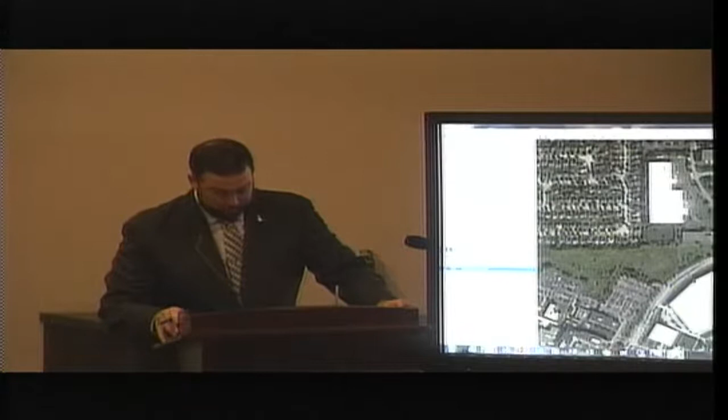Access to the property is from two points, one being off of Remington Boulevard to the southeast and one off of Wood Creek Drive to the northwest. The facility has adequate parking for the proposed use. Per the zoning ordinance, auto service, rental, sales, and supplies are not permitted within the I-1 district.

As such, the applicant is requesting a special use permit to allow a full-service auto detail shop, commonly known as Aesthetic Detail Studio, at 490 Wood Creek, Suite C. Per the applicant, the hours of operation would be 7:30 a.m. to 7:30 p.m., 7 days a week.

This is kind of like an appointment type thing where you would go onto his website, sign in, and pick out the time that worked for you, so he can be very accommodating in that area. All vehicles would then be brought inside to be detailed and no work would be conducted within the parking lot. This isn't like working on the cars per se, this is like your ceramic coatings, professional interior and exterior details, acid washes, things like that.

So the space is already accommodating with a floor basin that can handle fuel and oil and a separator. Staff doesn't have any objection to this type of use, and it'll actually be next to a use that does online car sales. Who knows, maybe they'll work together to detail some of those cars that he's going to sell.

So staff is recommending approval of a special use permit for a planned development to allow Aesthetic Detail Studio at 490 Wood Creek, Suite C, subject to all vehicles being serviced or stored inside the building. This concludes my report. Thank you, Mr. Eastman. Any questions from the commissioners?

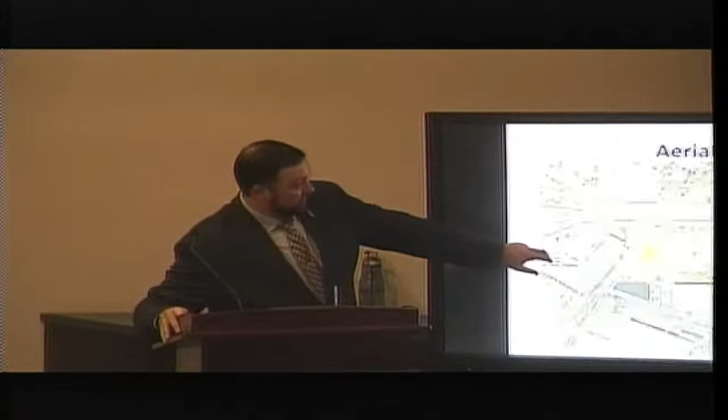This is located at the southeast corner of Stevenson Drive and east-south frontage road. So to get your bearings, this is Stevenson coming in here, and then frontage road is here with I-55.

The roughly 15.656 acres of land is zoned I-1 Limited Industrial and is located at the southeast corner of Stevenson and frontage road, the majority of which was previously owned by LaGrue Distribution and serves as the corporate crossing stormwater management facility. Access to the property would be provided off of frontage road for the east side of the property, and this is also connected to the next item in the agenda, which I will get into separately.

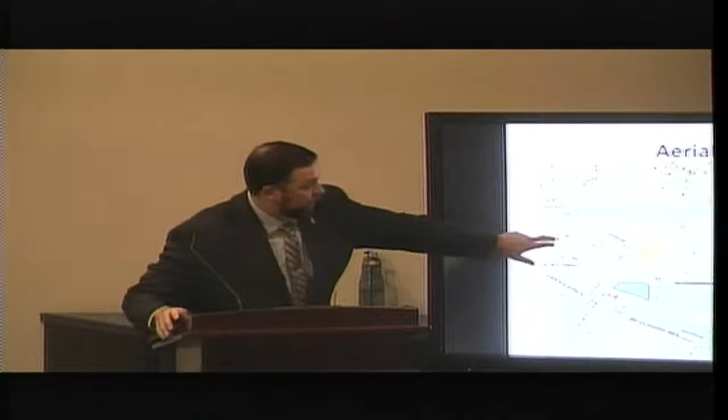They are here to first request a final plat of subdivision. The property total size, which would include 297 and 301 east-south frontage road, is 25.422 acres. It's all zoned I-1, and the purpose of this would be to subdivide it and create 5 lots of record.

Lot 1 would be approximately 3.5 acres, created for the parking lot expansion of Stevenson Crane. Stevenson Crane is on the west side of Stevenson Drive, but they do own this property, and they are looking to work in conjunction with this applicant to regrade the stormwater management facility in order to make this property usable for them to store vehicles on.

Lot 2 would be approximately 6 acres, created for the purposes of a stormwater management facility, and it would include specific language outlined in the Will County Countywide Stormwater Management Code. Lot 3 would be approximately 5.99 acres, created for the parking lot expansion of the previously mentioned 297 and 301 east-south frontage road. Lot 4 and Lot 5 total roughly 9 to 10 acres, and would be created for 297 and 301 east-south frontage road.

Within your packet, you have the proposed final development plan. This attached plan proposes to modify that stormwater management facility, which is pretty much centrally located within this development. This would be to construct a parking lot expansion for the benefit of 297 and 301 east-south frontage road, which would include roughly 117 truck stalls for short-term parking in conjunction with the existing truck, trailer sales, and rentals business. If you're familiar with Ryder Truck there at 301 east-south frontage road, they're doing quite well, so the additional space will help them utilize more inventory.

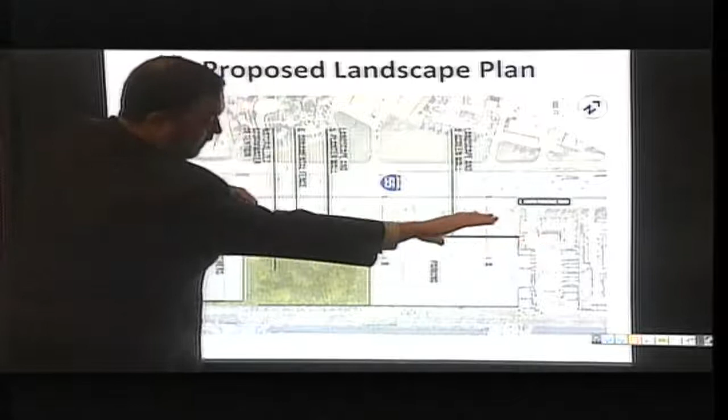Part of this plan, which you can see better on the color rendering, shows they're proposing to construct a 5-foot brick planter wall, and in front of the wall would be a 6-foot ornamental fence. If you've driven down frontage road here, the applicant owns some additional property and wants a unified look. He has a nice wrought iron fence going the length of the frontage road, so that fence line would be picked up by this new development, including the wall and landscaping to help screen the parking area.

In order to develop this property in accordance with the plan before you, he is here to request one special use and a number of variances. The first is a special use to allow the truck and trailer sales and rentals. The village is willing to support this, subject to approval of the landscape plan I discussed, including the wall and ornamental fence.

The second would be to install a non-dust-free surface within the parking lot. This darker gray area in the middle of the proposed parking lot would be heavy-duty concrete for the trucks to actually maneuver in. The stalls themselves are proposed to have CA6, which is by code a non-dust-free surface. Staff is willing to support that as requested; we just request that he take appropriate measures to keep any material from being brought onto frontage road.

Number 3 would be a variance to reduce the required front yard setback. Within the I-1 district, all these properties have to maintain a 35-foot front yard setback. The applicant is requesting to reduce that to roughly 5 feet in this area. But as you can see, his property backs up to a very large section of land owned and controlled by IDOT, so even with the reduced setback he will be quite a ways off of the road. Staff was willing to support a reduced setback in some areas to allow for proper truck circulation.

When industrial properties are developed, you're probably familiar with the berms along Remington that front any thoroughfare. In this situation, he cannot control or touch the IDOT property, and there's quite a bit of drop-off that has to climb back up. So it's somewhat of a berm, but not the typical undulating up-and-down berm. He's requesting a variance to waive that requirement as well as the irrigation system, and staff is willing to support that subject to all the landscape material he's willing to install, which is above and beyond what code would require.

Number 6 is a variance to relocate and distribute the required plant material within the side and rear yards as well as around the detention area. Typically when you create a pond, there has to be a certain number of plantings around the high water level as well as within the rear and side yards. He's requesting to take all that plantings and put it up front to provide as much screening from traffic on I-55 and the frontage road as possible. Staff was in support of that as well, since this will be a natural looking stormwater area, so rather than the plantings being hidden there, we felt it would be much better in the manicured front yard.

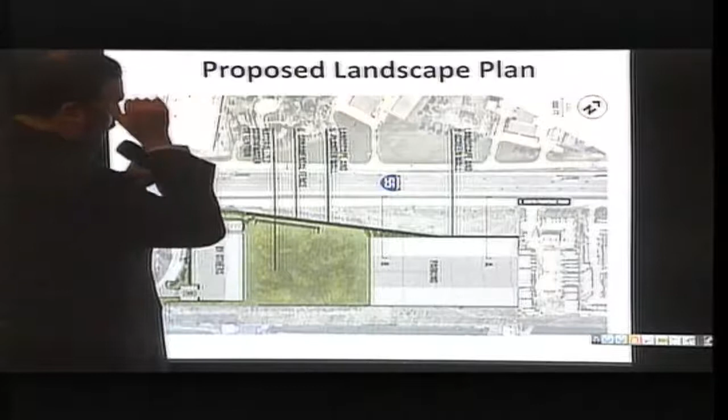Number 9 would be a variance to waive the required public improvements within the right-of-way along frontage road. When you develop a property, you're typically required to put in necessary public improvements along the frontage of the road—your parkway area with parkway trees, a sidewalk, and street lights. Well, frontage road doesn't have any of that, so we're willing to work with him on this as well, because there would be a sidewalk to nowhere essentially, and right now there are no street lights on any part of South Frontage Road, nor would we want street lights 75 feet off the road. So we're willing to support that variance as well.

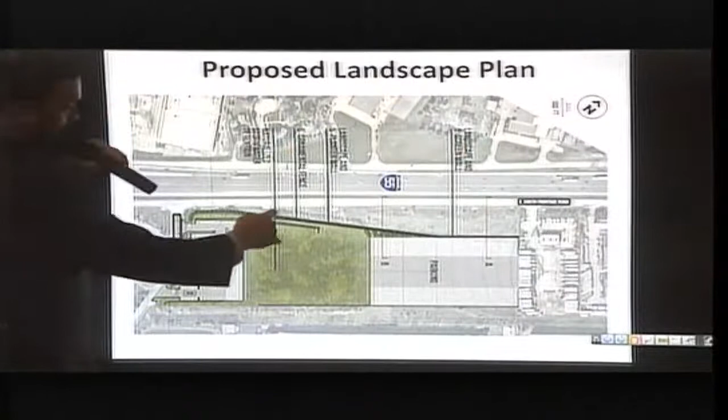Number 10 would be a variance to allow all the overhead utility lines to remain above ground. There are utility lines running within the IDOT property here, and when you develop property, you're typically required, at the developer's expense, to bury those lines. But in this particular area, which is an older part of town, all these lines have remained above ground. We supported the variance in the past for the property to the east of this, so this is just remaining consistent and supporting the same variance for this property.

Lastly would be a variance to increase the fluctuation of a pond. Chapter 33 of the municipal code requires pond fluctuation not to exceed 6 feet, and the applicant is requesting a variance to increase the fluctuation to 14 feet. It may not be that high, but we wanted to give them a little wiggle room as they finish the design of this reworking of the stormwater facility.

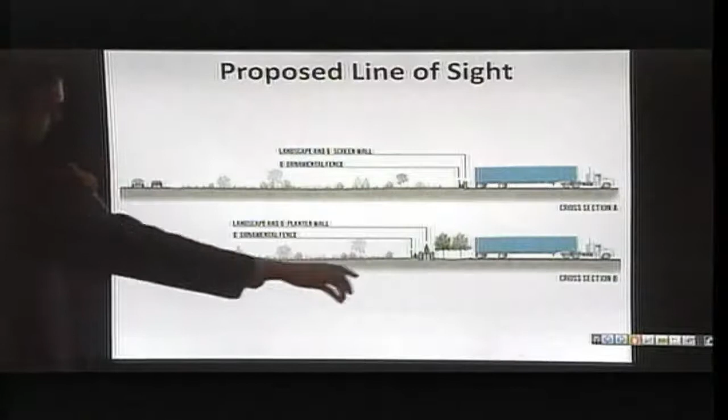That all being said, I wanted to show a few views. Cross-section A is up more towards the east side of this site. Before, he only has about 5 feet to work with, so he'll have the wall, the landscaping material, and then the fence, with all the IDOT property we talked about. As you continue moving west, he's able to construct a bit of a wall where he can have plantings on top, as well as the fence and additional plantings in between both sides. So it gets a nice finished look to the site, much more than what you see today if you drive down I-55.

With all that being said, staff is here to recommend approval of a special use permit for a planned development to allow for the construction of Drew Enterprises development at the southeast corner of Stevenson Drive and East South Frontage Road, with the aforementioned variances and special use, as well as recommending approval of the final plat of subdivision and final development plan, subject to all staff's comments from July 8th being addressed, and review and approval from the Director of Public Services and Development. And that concludes my report.

Thank you, Mr. Eidson. Any questions from the commissioners? Commissioner Shank asked: the setback was originally 35 feet?

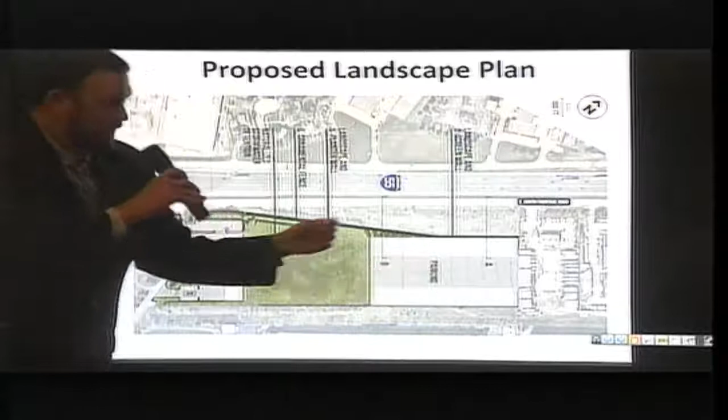They're requesting a variance. I think it's important to keep in mind that there's almost 80 to 90 feet of IDOT property here, so if you drive down the street it looks like they're giving you a 100-foot buffer. If you take 35 feet into that, he loses the ability to circulate the trucks inside of the lot, which is why we were willing to support it.

If you were right next to the thoroughfare, that would be a whole different story. Right, exactly—if he had abutted frontage road, that would be different.

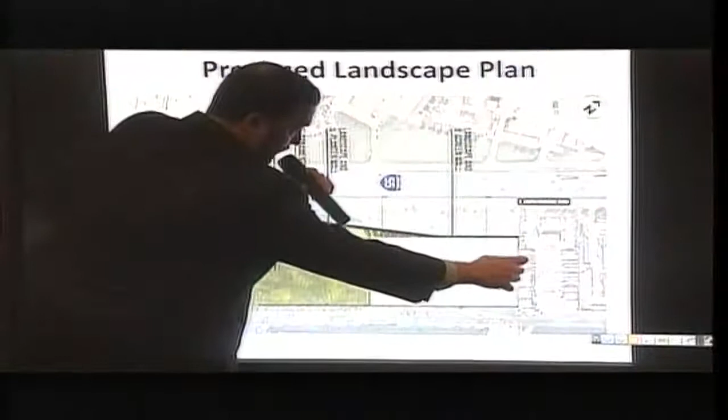Commissioner Shank asked: entrance and exit from lot 3 is only through lot 4? Correct. There will be a cross-access easement that allows the trucks to enter and exit onto frontage road as part of the plat.

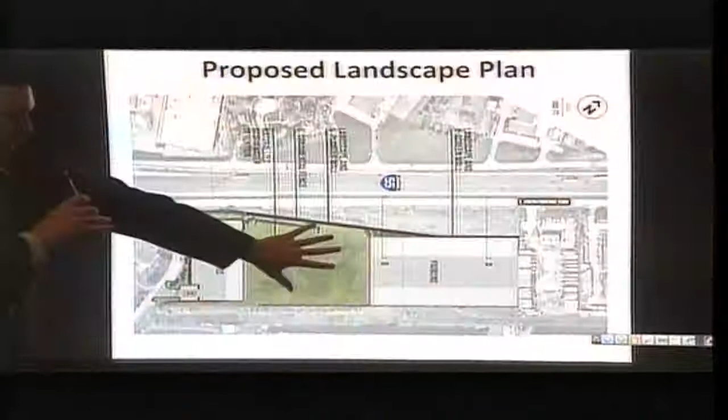Any other questions from the commissioners? Any correspondence from the audience? Seeing none, may I have a motion to close the public hearing, please?

So moved, second by Commissioner Schenk, second Commissioner Barrington. Roll call vote please: Commissioner Tucker, yes. Commissioner Schenk, yes. Commissioner Wright, yes. Chair Ali, yes. Commissioner Flores, yes.

At this time I'd like to motion to accept the findings of fact. So moved, Commissioner Schenk, second Commissioner Flores. Roll call vote please: Commissioner Tucker, here. Commissioner Schenk, yes. Commissioner Wright, yes. Chair Ali, yes.

Commissioner Flores, yes. At this point I'd like to call for a motion to approve the special use permit for a planned development with variances, final development plan, and final plat of subdivision for Drew Enterprises, project number 407.20. May I have a motion to approve? So moved, Commissioner Wright, second Commissioner Barrington Tucker. Roll call vote please: Commissioner Tucker, here. Commissioner Schenk, yes. Commissioner Wright, yes. Chair Ali, yes. Commissioner Flores, yes. Thank you, nicely documented, Mr. Eastman.

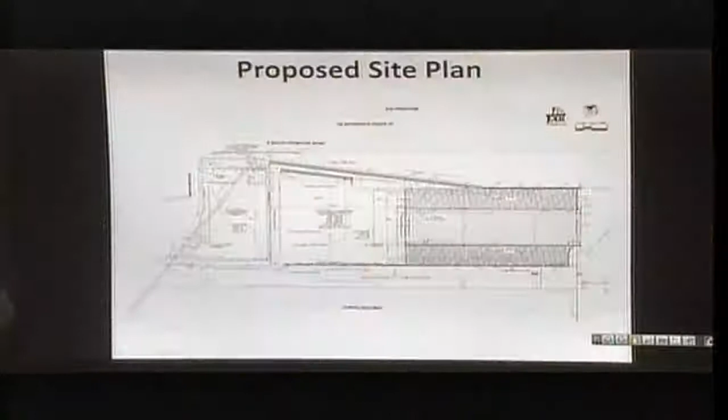We have a copy now. Yeah, I know, I was just... Sorry.

In order to develop the property in accordance with the I-1 zoning district, as well as the development code per the attached plan you have before you, the applicant is requesting the following.

One is a special use to allow truck and crane storage. It's pretty self-explanatory. Their operation involves the storage of cranes and trucks on their property, and they've done very good business in town, and they're busting at the seams. So they are looking to have additional area to store both trucks and cranes. This lot would be gated both at the entry point here and the entry point here. This area, I'm sorry, is the aforementioned fueling station, which would be only used and accessed by their employees.

The first variance would be to reduce the required front yard setback along Stevenson Drive. That's directly in this area. Currently, there are some stalls that were cut into the right-of-way area to allow for additional parking for them. They are looking to recreate some of this space and relocate those stalls, and as part of doing that, we're going to work with them and possibly either put an easement on these stalls or potentially deed over some more right-of-way to the village so that those stalls are not on private property. But in saying that, this area gets very tight in order to build the truck parking area, so we're requesting to reduce the setback to 10 feet in that area.

Number 3 would be a variance to allow dead-end parking. So up in this area, typically in all of our developments, we require complete forward motion to avoid the old 3-point turn to get in and out of a dead-end area. With this being employees only and not open to the public, staff is willing to support the variance to allow the dead-end parking in this situation. Also noting that it's not super deep, so when you get to this point, you should be able to tell if the lot's full or not. So we will support the variance in this instance.

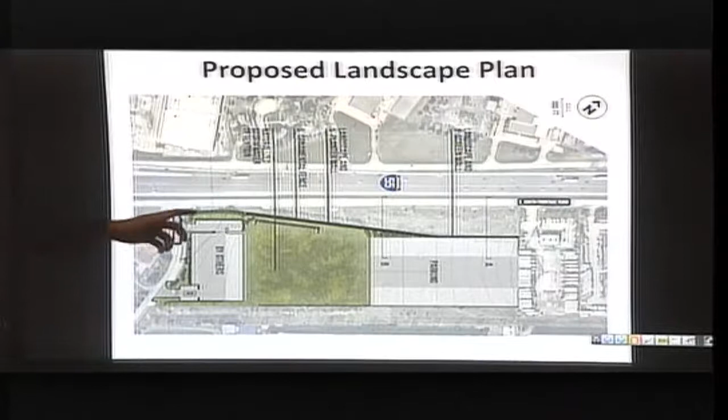A variance, again for the same reason I mentioned before with the other property, we are looking to waive the berm and irrigation system within the front yard along Frontage Road as well as Stevenson Drive. Both properties on this side don't have the berm and/or irrigation system, but they are providing more than adequate landscaping within that area.

Number 5 would be a variance to increase the maximum width of a curb cut, including the throat of a driveway. So the 2 curb cuts here, when you're maneuvering—I've never had to drive a crane, but trucks and cranes obviously do not have the same turning radius as your typical automobile. So they're requesting to increase both the width at the property line as well as the throat of the driveway, which is more in the middle, per the approved final development plan in order to allow for the proper circulation. Staff is willing to support that variance as requested.

Number 6 would be a variance to reduce the width of the curbed islands at the end of a parking row. At the end of each parking row, you're required to have an island that is 9 foot wide, back of curb to back of curb. In this instance, in order to allow for better maneuverability, they're requesting to reduce that to roughly 6 feet in some areas, and I think this one may be down a little bit below that. But we'll work on that to see if we can beef those up a little bit. But it's well noted that the landscaping required within those islands is still being provided.

Number 7 is a variance to remove more than 50% of the trees on site. Again, due to all the mass grading that's going to be going on in this area, there is a number of trees greater than 6 inches in diameter that they will be requesting to remove. And as part of the landscape plan, they will propose to replace those trees.

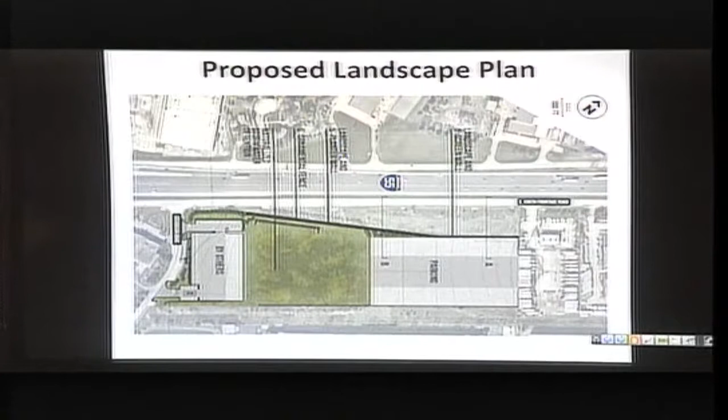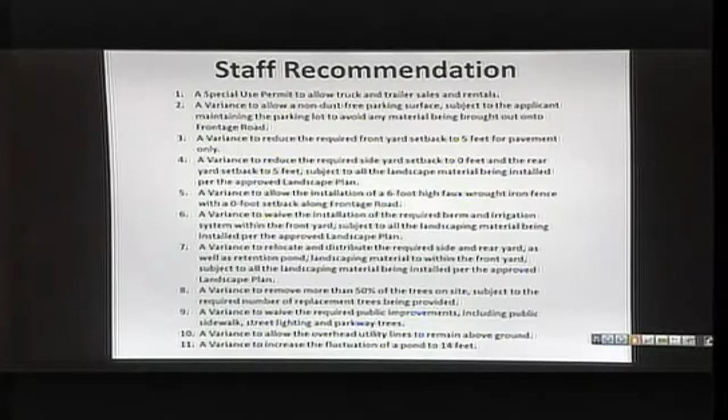Staff recommends approval of a special use permit for a planned development to allow for the construction of Stevenson Cranes parking lot expansion at 410 Stevenson Drive, subject to the aforementioned special use and variances as requested, as well as the approval of a final development plan subject to all comments from the memo dated July 13th being addressed, and the review and approval of the Director of Public Services and Development. This concludes my report.

Thank you, Mr. Eastman. Variance 3 - I don't get a warm feeling that the staff can see these trucks. There seems to be a blind spot. Can you explain the question a little bit, Barrington?

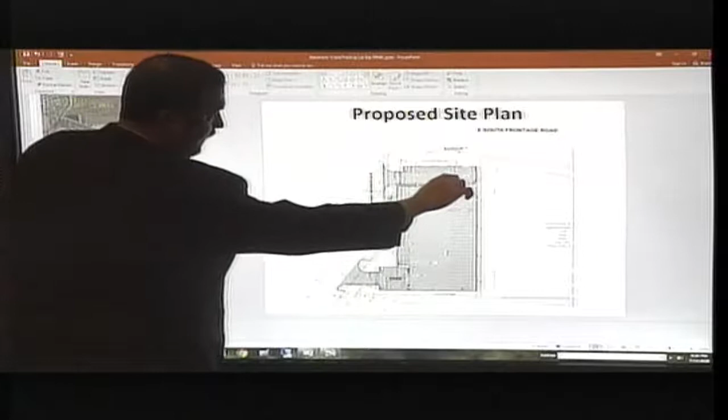He's talking about the dead-end parking, the employee parking, where they're supposed to be able to see if something entering is coming. If you're entering, at this point I think you would be able to see if this is full or not. If not, it's employee parking only, so that's why I'm willing to support it. We won't be driving in that parking lot, so it's really an inconvenience to the applicant, as it's not a strip mall.

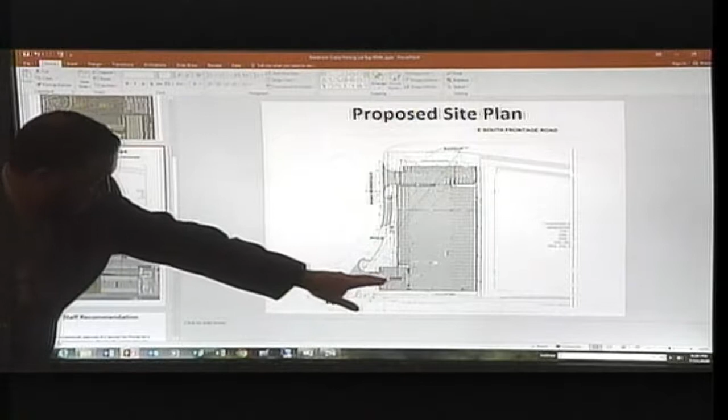Are they using the south entrance as well for the same purpose? No, down here is where they have their fueling facility, there'll be a canopy here. And there's not a pass-through access to the parking lot from the fuel facility? Well, this will be gated, so you'll have to have key access, a fob, or however they want to do it.

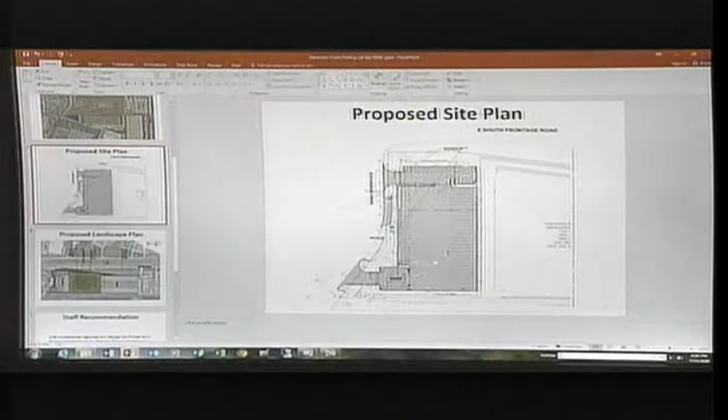Variance 4, requesting to waive the required berm irrigation system. You gonna replace it with anything, a fence or anything of that sort? So they've put in additional landscaping. If you've driven by the area, it drops off a lot, so they're gonna have to ramp up and build up versus having flat ground where you're taking dirt and making an undulating berm. This has to be brought up and then flattened out. So you're only dealing with 10 feet. In order to have a slope that remains at 3-to-1, you need at least 30 feet. So they just don't have the room here.

And we appreciate Stevenson as a business, so we're working with them to try to fit more of their product on the property. Absolutely.

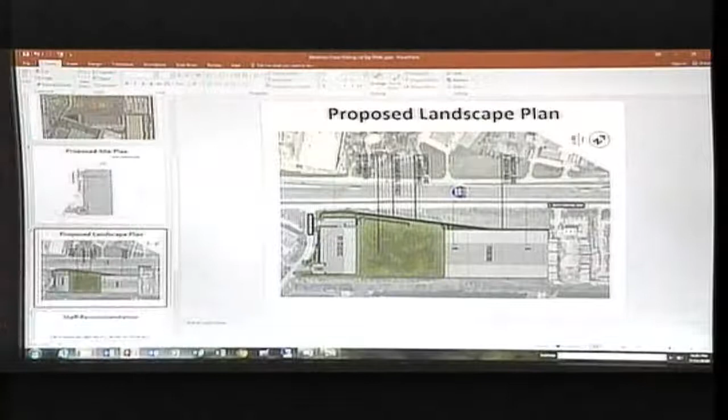Well, with variances 7, 8, and 9, we had already approved that in 407.20. Yeah, I mean, it's just, I'm calling out specifically for this lot versus the other one. So it's just mimicking that. The project pretty much mirrors the prior, which they've addressed.

Any other questions from the commissioners? Any correspondence from the audience? Seeing none, may I have a motion to close this public hearing?

Commissioner Flores, yes. At this point, I'd like to entertain a motion to accept the findings of fact. So moved. Commissioner Shank, second, Commissioner Wright. Roll call vote, please. Commissioner Tucker, yeah. Commissioner Schenk, yes. Commissioner Wright, yes. Chair Ali, yes.

Commissioner Flores, yes. May I have a motion to approve PC 20.07, approval of a special use permit for a planned development with variances, final development plan, final plat of subdivision, and adoption of findings of fact. So moved. Second.

411.20, my correction, please. Commissioner Shank, second, Commissioner Flores. Roll call vote, please. Commissioner Tucker, yeah. Commissioner Schenk, yes. Commissioner Wright, yes. Chair Ali, yes, Commissioner Flores, yes. We stand approved. And thank you, Stevenson, for their investment in Bolingbrook.

Next item on the agenda, we have PC 20.10, approval of special use permit for a planned development with variances, final development plan, and adoption of findings of fact, project number. Is that correct, Matt?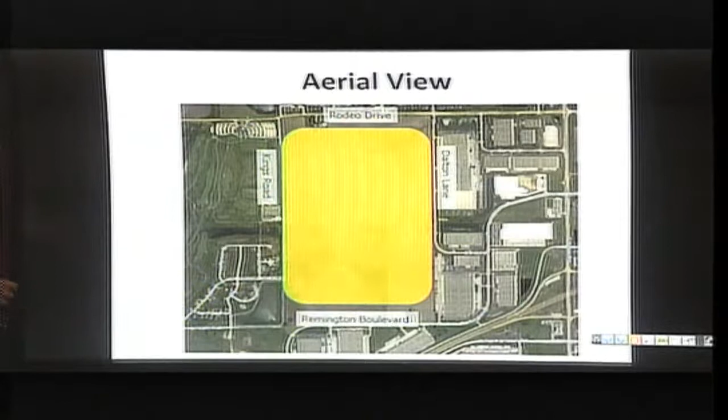So the overall site, not including the 40-acre piece, which is a separate item tonight, is roughly this large farmland here. Two buildings have been constructed on this site, one being Best Buy, which most people are probably most familiar with. The applicant is seeking approval of a rezoning for a portion of this property from R3 to I1.

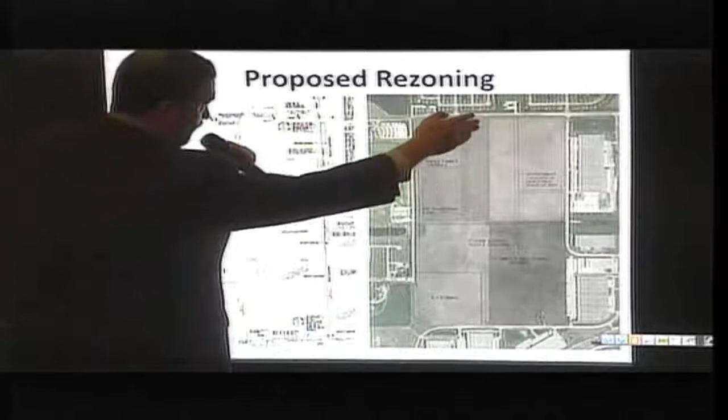This is the gray area here that you see. What was approved back in 2016 — essentially the proposed berm, which we'll get into, meandered to the east a little bit. As part of what they're requesting tonight is to straighten that berm out and come straight down, which we'll get into more with both reports.

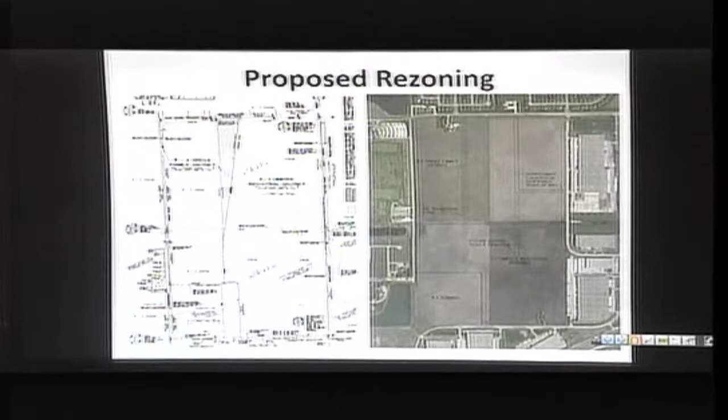The Village Board of Trustees approved the original rezoning request as part of an annexation agreement for the site back in March of 2016. At that time, roughly 214 acres were to be zoned I-1, limited industrial, with 112 acres being zoned R3, single family.

You have the exhibits. Per the attached exhibits, the applicant is proposing to rezone approximately 15.22 acres of the overall 326-acre site from R3 to I-1, in order to develop the property as part of Carlow Corporate Center West.

We're here just to simply ask for the rezoning now, but I felt it was important to add a couple things, which are part of the annexation agreement they're requesting to amend — that will be a separate hearing. I wanted to include this to provide background as to why staff and the village are willing to support the request. Per the agreement, a 100-foot berm would be constructed between the transition yard from the industrial to the residential property.

It's depicted on this exhibit. It would climb all the way up 15 feet with a 3-to-1 slope, then flatten out roughly 10 feet, with plantings on both sides. All those would be evergreen-type trees that stay green year-round and would continue to grow throughout the duration of the berm.

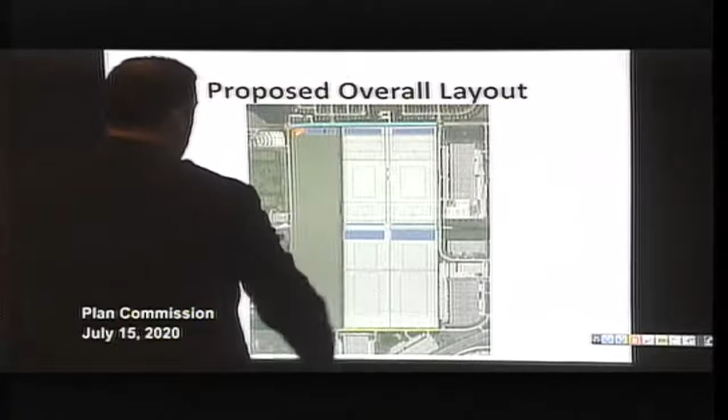I don't want to block everybody here, but this is the existing Best Buy building, and this is the building at 999 Dalton. This is kind of phase 1A. They were developing the industrial site in phases, so they'd build 1A, then move north and do 1B. Anything west of this future drive lane or future road up the middle would be part of phase 2. Any part of phase 2, or any residential development, would ensure the entire berm gets built. We don't know exactly when Northern's phase 2 will happen, but we wanted to talk about a couple things tonight.

One is the improvement of Rodeo Drive, which everyone has gotten to see the fruition of, and it's turned out pretty good. You're going to get a new streetlight signal at Dalton and Rodeo. We have the Rodeo improvements already built, the roundabout is just about done, and the water features are what's going to start next.

As they move further into 1B, they're going to need dirt to construct those lots, and that's where they'll start to excavate those ponds. Those ponds range from 200 feet to almost 220 feet in width, providing a real nice natural buffer off of Rodeo Drive. You won't have parking lots or buildings right on top of Rodeo Drive. That was something approved in 2016 that we're carrying along here.

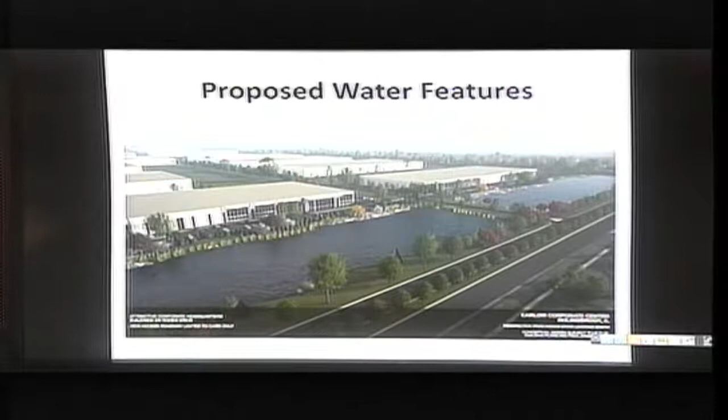I wanted to show Rodeo Drive down here, with the median being constructed, and this future road I talked about, which would be right-in, right-out only. There would be absolutely no ability for anyone to head west on Rodeo Drive and enter the site. All truck traffic would have to make the left on Dalton and circle back into the development. But most of their trucks will actually be coming off Weber Road, making that left on Remington and heading over to Dalton, entering the site through the back, which I can actually show.

Majority of the traffic is going to be coming off I-55, getting to Remington, making that left-hand turn, coming down to Dalton, and entering the site. Most won't go all the way up to miss this light and make the left to come down this way, since it's out of their way. But if they did get to this point, or happen to be coming straight across, they'd be forced to make the left-hand turn here. There'll be plenty of signage, and this median goes all the way down to the roundabout, so there's absolutely nowhere else for them to go. This is also not a truck route, so they'd be fined and ticketed if it happened continuously.

That left-hand turn allows them to enter the site here. This middle road is really just to serve the workers, in case they don't want to go back out that way—they can come up to the T and take a right, shooting out for lunch or whatever. I wanted to show that to clarify where the majority of the trucks are going to be coming from, because I know that's a concern.

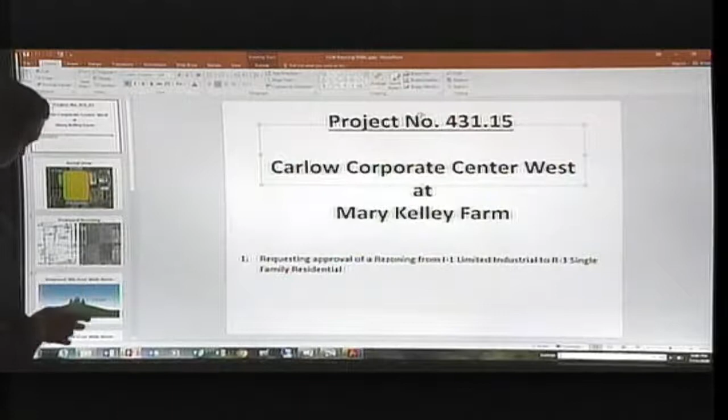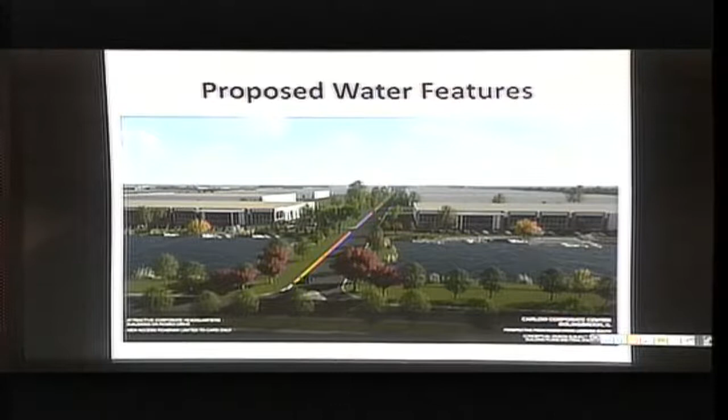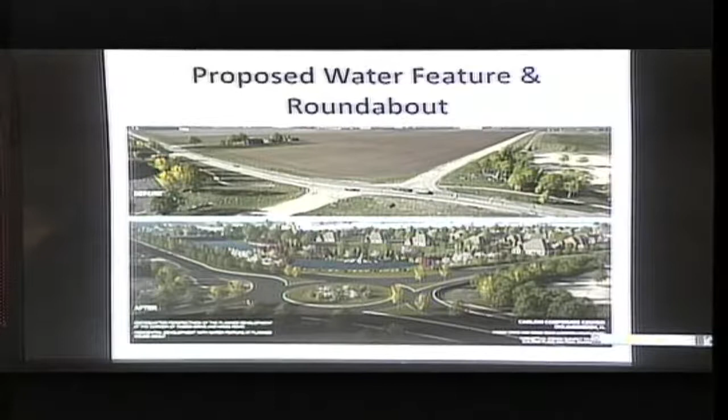So whatever residential developer comes along, just as they've done in the past, they would be required to rebuild Kings Road in that area. So it would be your typical median, one lane on each side, with your nice parkway, and walkways on both sides, just like the one that was just completed, or almost completed. I think it'll be ready next week. So, that's what you could expect in that particular area.

I can continue to provide more information, but at this time I'm going to recommend approval of a rezoning from R3 single family to I1 limited industrial for that portion I mentioned before, the property located at the southeast corner of Rodeo Drive and Kings Road, subject to the approval of the First Amendment to the annexation and annexation agreement. And that concludes my report.

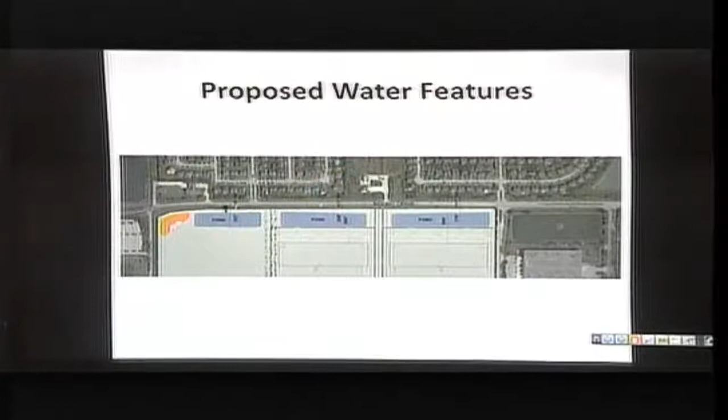Thank you, Matt. I have some comments and questions before I hand it over to the commissioners. The water features mentioned—could you tell us how far the nearest resident is on both sides? Southgate is here and Summerfield is here, and this is the Crossroads Would Church property, maybe 500-600 feet. As you can see here, roughly from the front of this building, it's approximately 560 feet from the building to the nearest residential property.

And Kings Road—first, we're very thankful for Northern. They've gone above and beyond to accommodate many of our requests and the arrangements we've had with them. Once this project is done, on the residential side, if approved, there's a lot of improvements being done to Kings Road. Could you speculate on that as well, please?

So the Kings Road would essentially be constructed as the new Kings Road is just north of Hassert, basically all the way down to where Remington is. It'll come straight down, and as Remington Road curves right here, it'll tee into Remington, and the residential development would be responsible for making that final improvement to Remington. So Remington would be redone all the way from here to where Kings Road connects, and then Kings Road all the way from there to the roundabout.

Is that on part of Northern Builders? No, it would be part of the residential project there, the development. Right. And Northern was responsible for Rodeo, the water feature, and the berm, and then their portion of Remington on the industrial side.

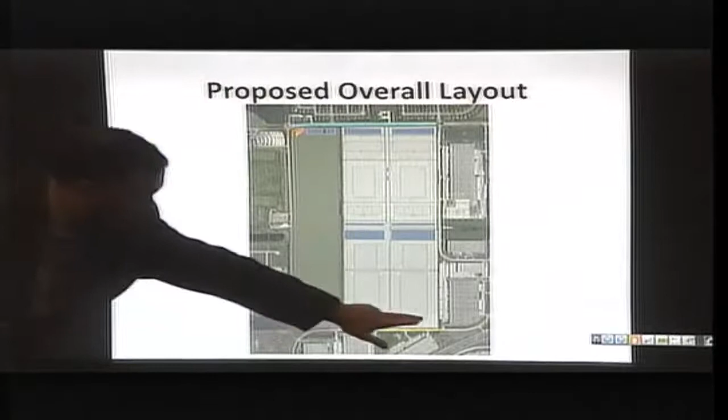So for the new residential phase, the entrance—are there going to be driveways facing Kings Road, or how's that going to work? No, within the actual annexation agreement itself, it limits them to only having curb cuts that would be main entry points into the subdivision. So we don't know how this will be developed or where the roads will come in at this point, but there will be no residential driveways actually facing or connecting to Kings Road.

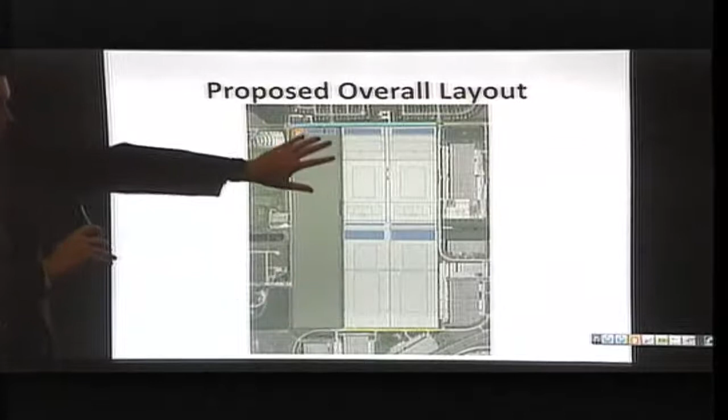And the berm itself, between the two—will it be done before the residential side starts? So there's a couple different triggers, but the way the agreement reads is that if Northern starts to construct any part of Phase 2, they have to start constructing the berm in 1,000-foot increments. As for whether they start south and move north, or the other way, I would assume they'd probably do similar to what they did over here, building the berm in 1,000-foot increments as they moved north.

That being said, if next year a residential developer comes after this is subdivided and is very interested in developing this property, and wants to get residential going right away, then Northern is responsible for building the entire berm before that residential construction can begin. Is that pretty standard, like 100 feet wide? This will be the biggest berm in town. It would protect the integrity of the residents. Yes, that's why we wanted to make sure the berm would be done, finished, and landscaped before this residential development began.

Who's going to be responsible for maintaining that berm? Northern Builders, until they have an association created within the entire Carlisle Corporate Center, and then the association of Carlisle Corporate Center would take over maintenance.

That's not the only berm that would be developed. There would also be a berm along Kings Road when they develop the residential property, similar to the berms you see on 115th or Hassert in some of the more prominent subdivisions to the north, with that 4 to 5 foot undulating berm with landscaping that within 5 to 10 years becomes heavily full and creates a nice buffer along King. So you'll have a berm, then your backyard, houses, residential streets, and eventually the second big berm.

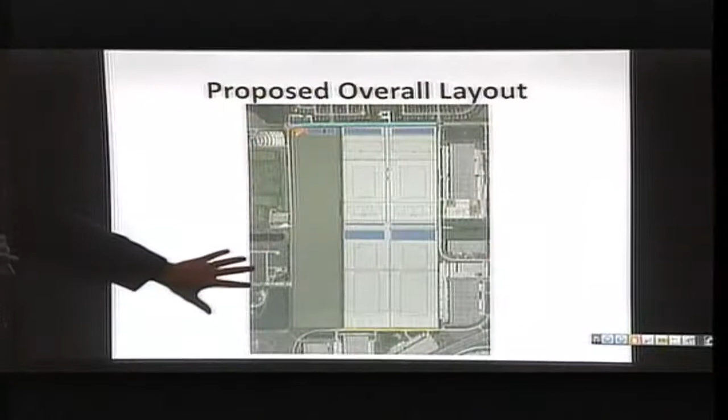The way we cut this up, done before I started here, 15,000 square feet was the smallest in Phase 1 and 2. South of Reagan Boulevard, the future lots aren't 100% done, but those range from 9 to 10 to 11 to 12,000. The thinking was you'd have a smaller product, a lower price point than the houses directly on the golf course, so we wanted to meet in the middle and say 12,000 square feet would be the minimum, still 3,000 square feet bigger than any of our regular single-family houses. Code requires 9,250, so at 12,000 there's still quite a bit bigger lots than typical.

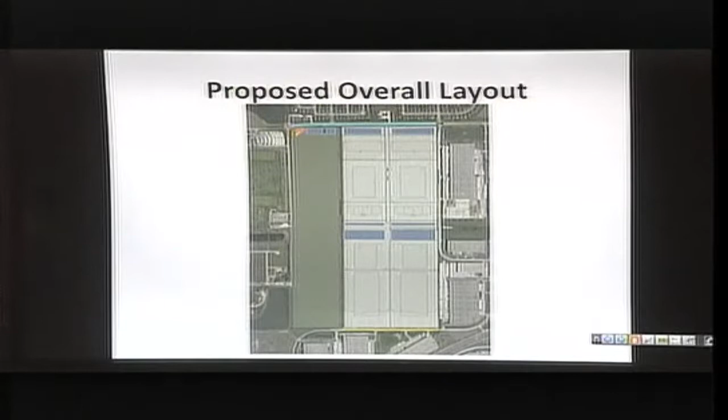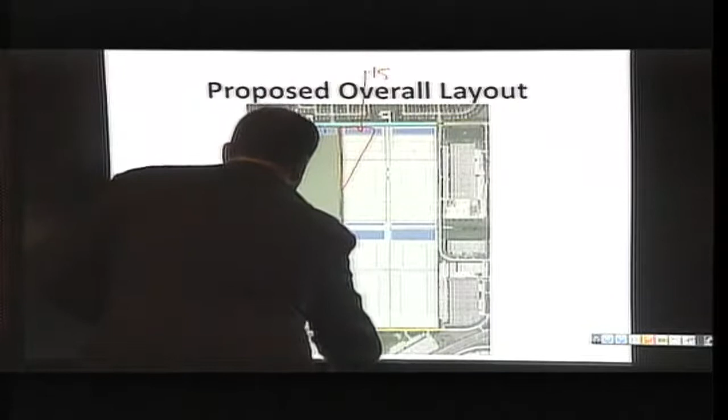I understand the rezoning of that school property is the next item on the agenda, but just so we're clear, we're losing about 15 or so acres and gaining about 32 acres in residential, correct me if I'm mistaken. This is obviously a rough drawing, but say we lose 15 residential acres here, this large 40-acre parcel, and we're picking up 32 of the 40 as residential R3 here. So we're going from about 112 to about 129 acres residential.

And I assume the rezoning deal going through with the school, Plainfield School District, is going to have a price tag that alleviates some debt off the school books, correct? Yeah, correct. I'm not at liberty, I don't know the exact price point, but I do know Plainfield School District paid commercial prices when they purchased that 40-acre site, it wasn't something they got cheap. With my experience that's a pretty decent price tag. Who would benefit, the residents, they're all Plainfield District, correct? Correct, this is all District 202. So they would benefit from that as well. Correct.

Commissioners? I think you said it all, Chairman. I think you did. No.

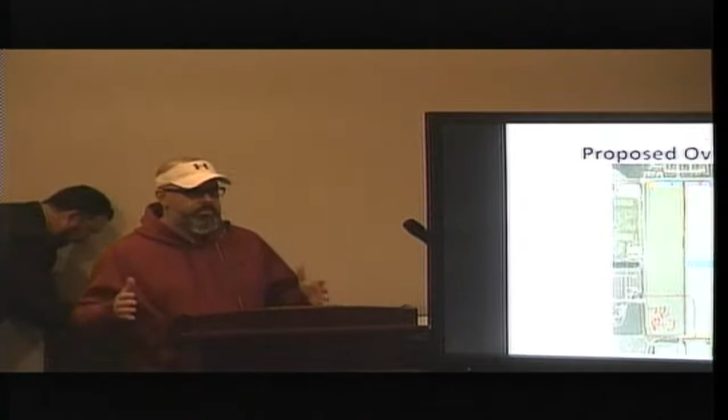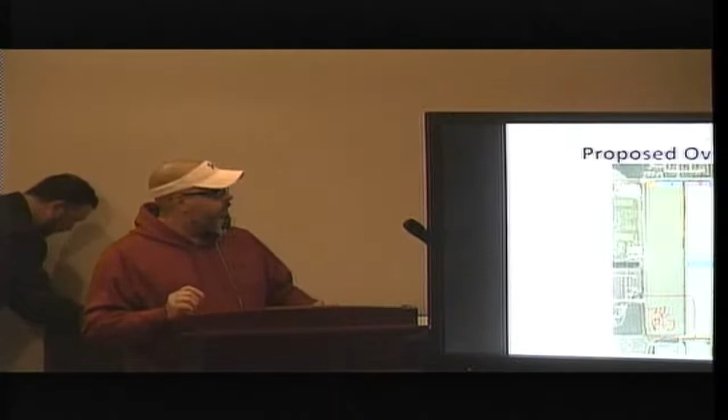My name's Jason Fox. I moved into Bolingbrook about 5 years ago, and we bought the property in Southgate, right on Arlington Street, which is right about where that line is. Our backyard faces Rodeo, so when we moved in we had big old farmland across the street from us. Granted, we know progress happens and suspected the land would be developed at some point, and I'm all for that. When I attended the initial hearing on this, the plan presented had the berm starting essentially where Crossroad Church is in the middle and meandering its way east, which I thought was a considerate plan, taking into account the residents of Southgate and Summerfield. By removing that, now we'll have that corporate building literally right across the street from us.

As far as the real estate and property goes, I'm not sure why that can't happen either way in the bottom left quadrant, but removing that triangle is going to directly affect the residents along Rodeo. In the bottom right quadrant, where the two buildings have been built, it's about 1.25 to 1.5 miles away from the residents along Rodeo, and we're constantly hearing trucks backing in, the backup noises at all hours of the night. So while I appreciate the front facade facing Rodeo won't look like a truck stop, it's not the look necessarily as it is the noise.

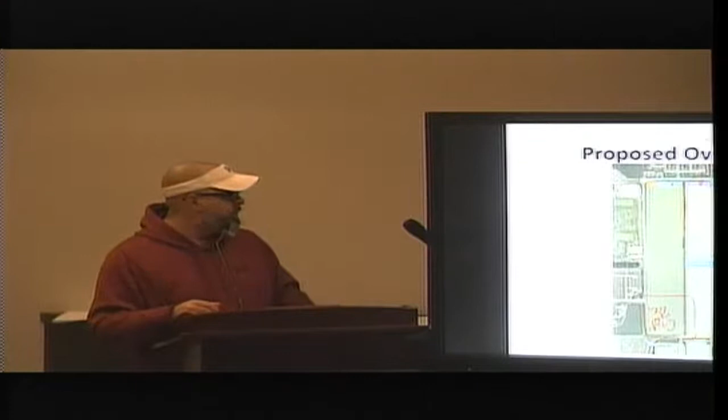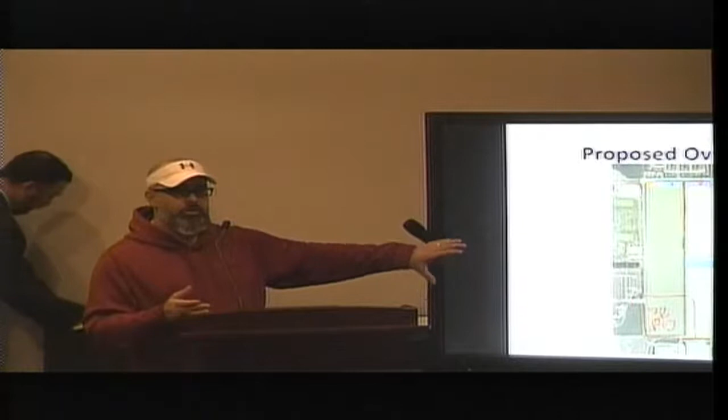The trucks coming and going. Super appreciative that Rodeo got expanded, and that's all well and good, but considering all the corporate buildings you're putting there, the traffic's going to go up pretty significantly as well. So I'm opposed to the change. I thought the initial plan was fair and equitable and took into consideration the residents that are already here, not to mention property value. I'm glad they're still going to have a portion of residences going up. The concern is what happens a year from now when they try to rezone it to have it all commercial. So I'd prefer for the plan to stay as is.

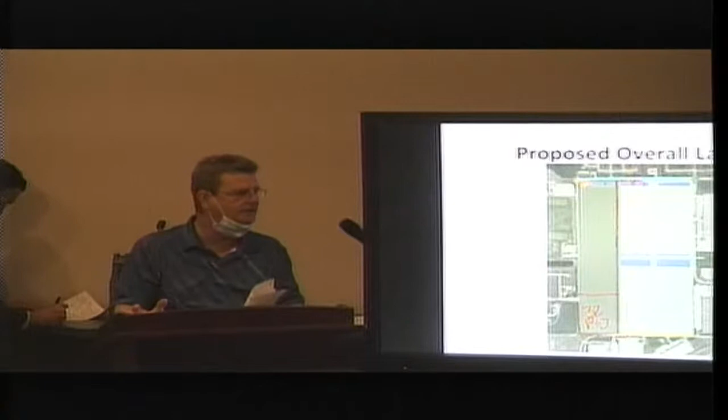Because we know that as the buildings go up and come closer, even with the glass fronts and all that great stuff that comes with what's called limited industrial zoning, warehousing and things like that follow it. And that has a negative impact on our property value as well. So it's not just the look, it's the sound. There's a financial impact that'll hit us homeowners in the future at some point. I'll be honest, I'm 10 years from retirement. I'm not going to retire in Bolingbrook. That's going to have an impact on where our finances go as a family. And I'm sure it will for these gentlemen as well, and anybody else that backs up to that location.

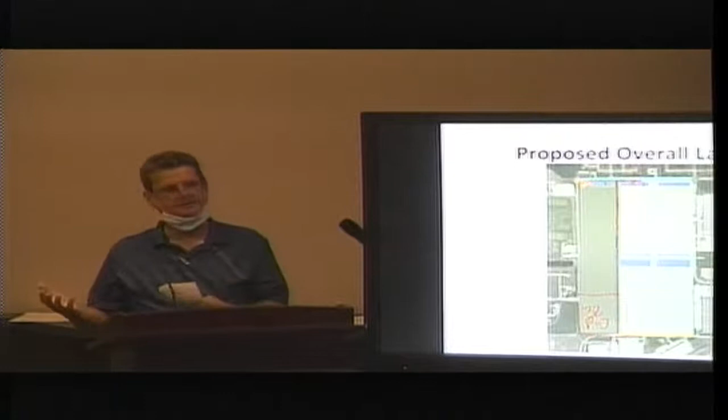I'm in the warehousing industry. I've worked for a warehousing company for 35 years, so I know how that all works. I know the noise, I know the sound. You can be across the field and still hear the truck noise, the brakes, the beeping of the beepers when they're backing up, the truck spotters backing up. And then on top of that, for warehousing, if there's any type of refrigeration in there, whether for dairy or frozen product, you're going to have those units running, whether it's equipment for the building or for the trailers parked there. That sound will emanate out and will travel.

I'm certainly opposed to the change and would like to see it stay residential as it's currently zoned.

You swear to tell the truth at this public hearing, sir? I do. Please state your name. Sonny Pittman? I'm sorry, Sonny Pittman? Sonny?

Yes, sir. I'm a resident of Summerfield, and my backyard is Rodeo as well. I was opposed because of the noise. I stay right in the cul-de-sac, a block from Dalton and Rodeo, and I hear the noise all night. I hear the forklifts, I hear the trucks, and not to mention that, there's not supposed to be truck traffic past Dalton, but I have a neighbor who kept count, and on the 7th of July, there was 5 dump trucks, 7 cement trucks, 7 semi-trailers, a flatbed, and 6 box trucks, and that's just between the hours of 9 and 5 p.m.

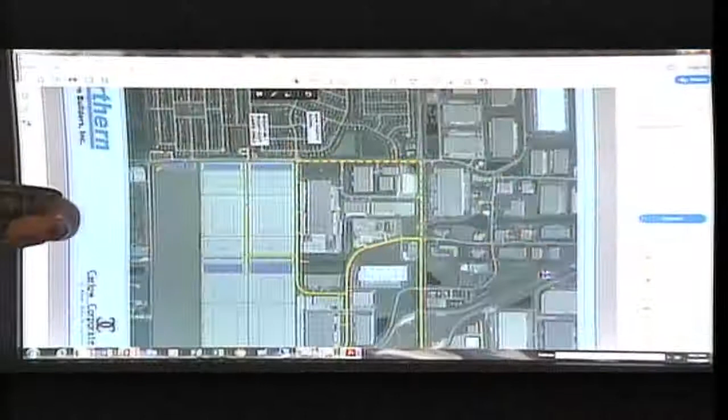I'm actually currently right here, right on that corner. In this area, from what I'm able to see—I work from home—every day I see, obviously there's cement trucks and dump trucks going through, but the number of semis I've seen going west down this road past Dalton, connecting to 59, wherever they're going off 59, also coming back from 59 going this way to turn into whatever area they're supposed to be going to, is astronomical at this point. I mean, 5 to 7 in an 8-hour period—one semi truck an hour.

What I'm concerned with, not to mention the sound we hear all the time, is just the overall traffic route going through with the semis and trucks coming through there.

Then, what's to prevent further warehouse expansion into the planned residential area? We allow this—how much more is going to be allowed down the road? Another 15, another 15, another 15, until the rest of this is all residential. Now again, I'm only coming into this from a year ago, and at the time I was buying the property I was told this was all going to be residential. I didn't know you guys had already planned this out in 2016. But again, the noise, the sound, the constant truck route coming through here is just unacceptable.

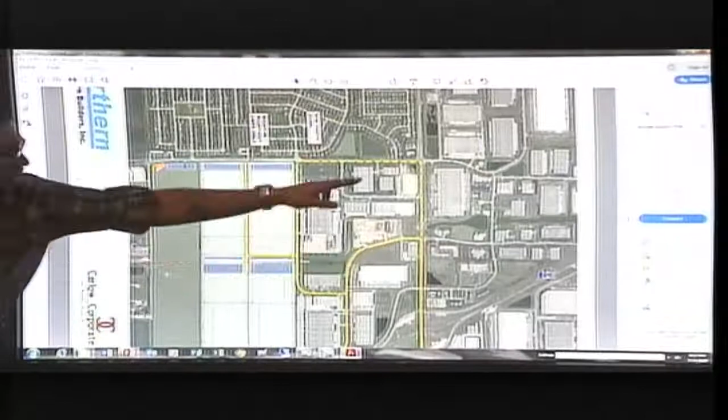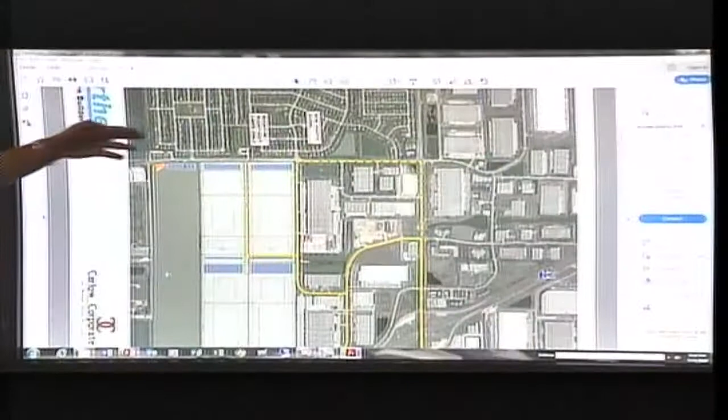I don't see how, if they're not using this route currently and they're still coming down here to make their turns or wherever they're going, or coming off 59 and back the other way, what's to stop more and more traffic, more and more trucks and semis coming through this area, especially if it's only going to be a right turn up here. Our residents in this neighborhood will be coming off 59 and coming down this way.

And as mentioned, if there are trucks supposed to be going through this area that would be fined and ticketed, I'd propose we start now and get money back into Bolingbrook—put some police presence out there and start ticketing these drivers using this area. That's a non-truck route at Dalton and Rodeo there.

And I guess I'd just like to know what more signage and other information is going to be put there to deter and stop the semis and trucks in that area.

So again, I'm going to have our planner address that for you. Those are all valid questions, and I thank you very, very much for bringing that up. At this time, I just want to back up my fellow residents and say I don't agree with the current plan of adding more space to this area. So, thank you very much for your time, Keith.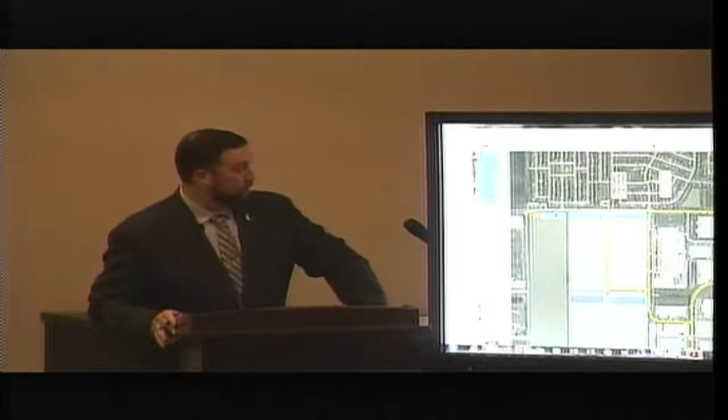The curb cut, I guess, went away right after that meeting. The amount of complaints we got from residents to keep a curb cut there far outweighed what the church wanted in terms of the left turn into their property. Everyone feared that if that curb cut stayed there, it would only encourage more traffic to go past Dalton.

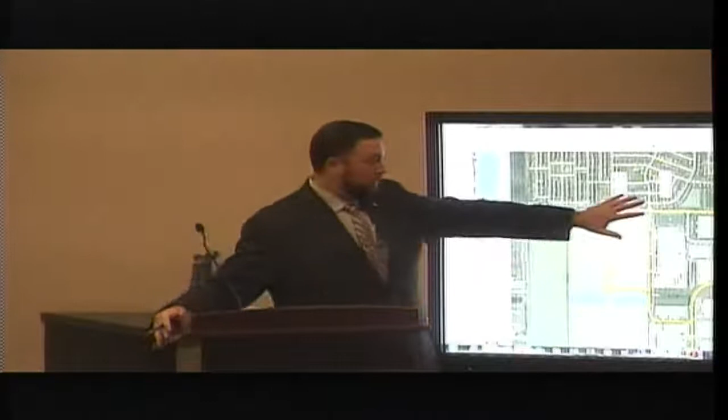So the closing of the median was a decision to appease a lot of the residents' concerns to eventually get truck traffic away from Rodeo Drive. There was a huge concern that if we allowed that curb cut there, it would only allow them to think that's an extra way into the property.

So I'm not saying it wasn't promised, but it was definitely a discussion that happened pretty right away after that meeting. That shut down.

I think you guys did an excellent job trying to make everybody happy. This is probably the best situation we could come up with for the school parcel, straight lining it that way. This is the biggest piece of land we'll have to deal with that isn't residential in the Bronx farm area, and there isn't much around here to develop on.

We're pretty much landlocked. So if you're thinking there's going to be more truck stops here, there aren't - it's just a limited industrial area, and I don't think there's any development left. We're pretty much landlocked, and I think you guys did a pretty decent job. Thank you for that.

Anything else to add? Did you guys want to add anything? Sure, please come on up.

I won't go through everything again, but everything I mentioned previously in terms of the berm, the maintenance of it, the landscaping, as well as all the different requirements and part of the annexation agreement would be mimicked in this agreement. Therefore, staff is here to recommend approval of a rezoning from ER, Estate Residential, to I-1, limited industrial, and R3, single-family residence, based upon the zoning map that you have before you for the land located at the northeast corner of Remington Boulevard and Kings Road, subject to the approval of the annexation and annexation agreement. And that concludes my report.

Thank you, Mr. Eastman. Any questions from the commissioners? Any correspondence from the audience? Seeing none, may I have a motion to close the public hearing?

So moved. Second. Commissioner Wright, second Commissioner Shank. Roll call vote, please. Commissioner Tucker? Here. Commissioner Shank? Yes. Commissioner Wright? Yes. Chair Ali? Yes. Commissioner Flores? Yes.

At this point, I'd like to call for a motion to accept the findings of fact for this project. So moved. Second? Commissioner Shank, second Commissioner Flores. Roll call vote, please. Commissioner Tucker? Yes. Commissioner Shank? Yes. Commissioner Wright? Yes.

Yes. Last but not least, a motion to approve PC 20.08, approval of the rezoning of ER to I-1 and R3 and adoption of findings of fact, project number 409.20. So moved. Commissioner Shank, second Commissioner Flores. Roll call vote, please. Commissioner Tucker? Yes. Commissioner Shank? Yes. Commissioner Wright? Yes. Chair Ali? Yes. Commissioner Flores? Yes.